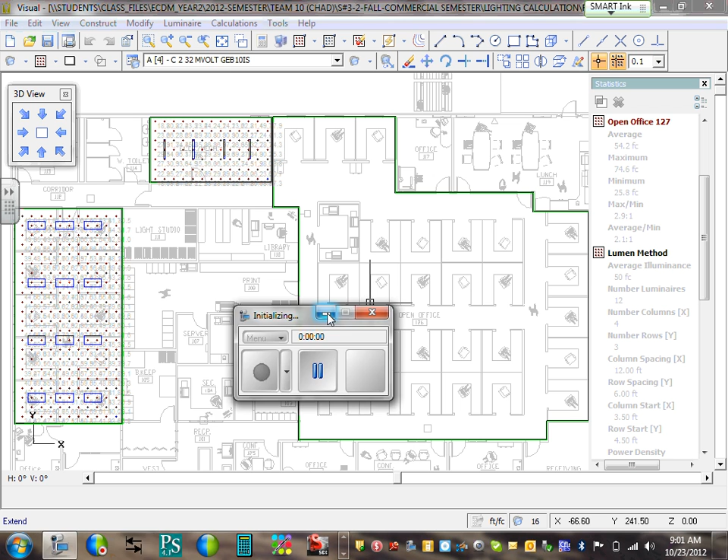December. So if you're interested, maybe just talk to Chad and Chad can send my boss a note, get you set up, get you an interview or something.

If you're interested. Yeah, do you want to say a few things about what you guys do, where you're located? We're located in Eden Prairie, right off 212 and Flying Cloud Drive, Shady Oak Road. We're a lighting manufacturer's representative, so what we do is we have not just Lithonia, we have probably 50 other brands of lighting that we try to get on the jobs that are currently going on.

What we'll do is we'll give them a layout, we'll give them options, and try to get our products on these projects. And it kind of starts right here for us. Some will have a big warehouse, they have no idea what they want. They got some old existing lighting, and we'll present them with 3-4 options of either LED or fluorescent high bays and things like that, and hopefully they buy from us.

So if you're interested, just let Chad know, and you can get a hold of me or Jeff, or we'll get it over to the chief and see where it goes. So you guys all have done quite a bit of this. Is there anything that's been difficult, or you have a lot of questions about? Yeah, you got a lot of this done already.

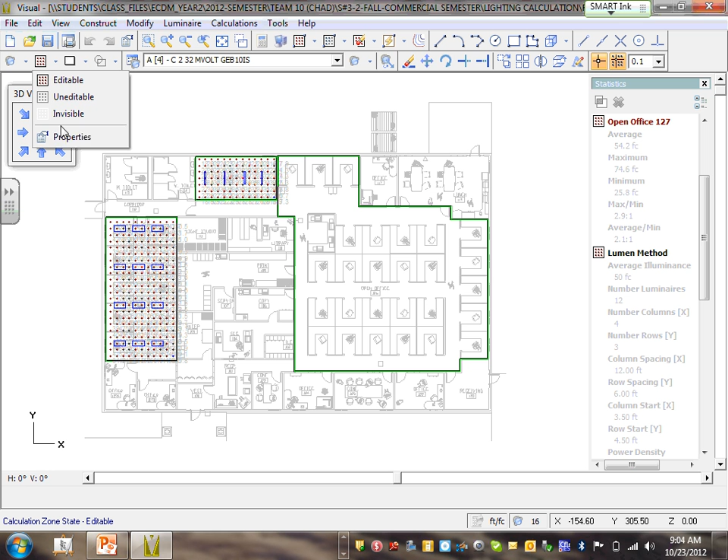Is there a way to hide the calc zones, so they're not clogging up the plans? Yeah. If you just look right over here, these are basically your layers. There's only 4 of them. So right here, it's calculation zone. You can do this a couple ways. You can go here and go down to properties. It'll bring up all our calc zones. Now on this one, we only have 2.

If you click on the first one, hold shift, select them all. There's this active button here. If you just turn it off and hit OK, they'll disappear. They're still there, so you won't have to go back in and add them all again. You can go back in and turn them on. Or if you want to turn individual ones on and off, you'd have it right here. Say for some reason you wanted just this calc zone off, you can just select that one, and same thing, turn it off.

Did you guys already build? I saw you had a list of all the fixtures. Did you build most of your schedule? Will you be using this schedule on other projects down the road, or will the types be different? We're going to be using LEDs next project. Okay, so they will be a little different. Good idea to talk about exporting the schedule too.

Yeah, if you were an architect or engineer, what you would do, we try to get in their office with engineers. Usually engineers will have their own schedule of lighting. They'll have their A, B, C, D. They'll have types of fixtures that they use on primarily all their projects. Well, we try to get in there.

So for someone like them, what this would help with is once they build this thing, you can actually export this and save it. And then when you open up another project, you can just bring the schedule in, so you don't have to sit and go find all these files. And depending how big the schedule is, that can save you a lot of time. Did you guys see that one? Just easy. Just export. You just save it to your desktop. Schedule or something.

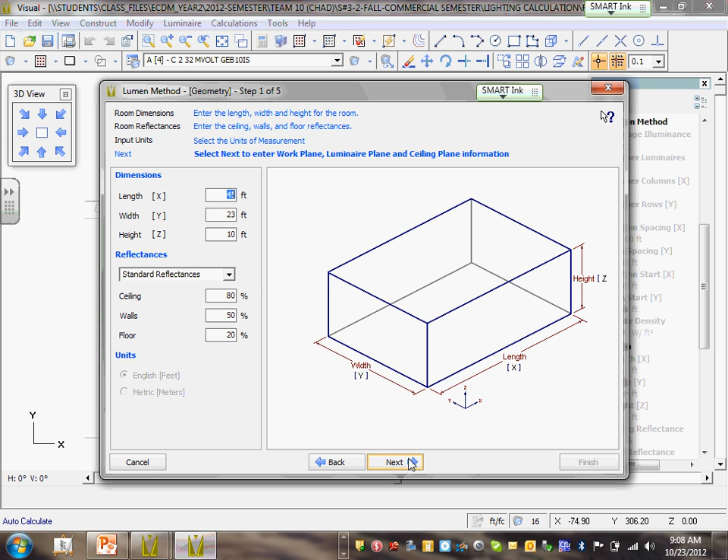As far as if we did the lumen method, let's see, let's just do a couple quick. So perfect. It's already done. So I'm just going to show you if we have multiple, like he was asking. We're going to say we have this room here, and then another room of the same fixture. This was just an example to show you how you get the two duplicate fixtures in your schedule.

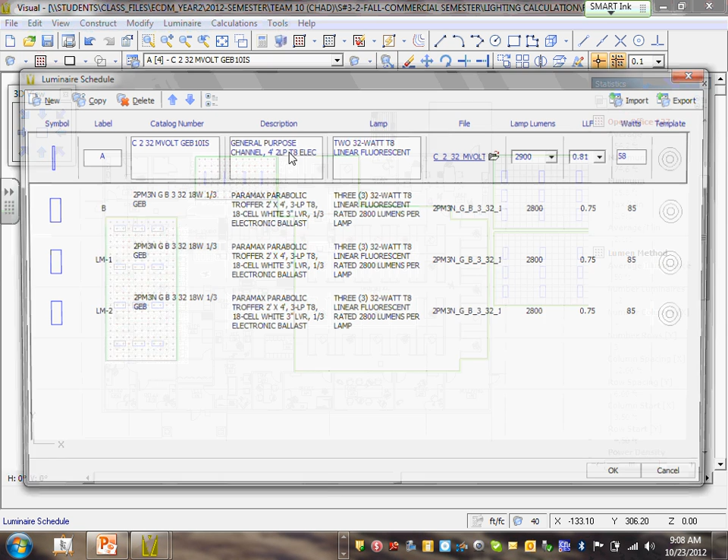So on our schedule, it automatically brought in these two. They're both the same. Well, that's just going to be cumbersome. You're going to have to go through, and it's going to be confusing. So what I'll do is come in and relabel one. Let's just say this is type C, even though it is the type B. Well, actually, we don't even need to do that. We already had our type B in our schedule. We'll just leave that alone.

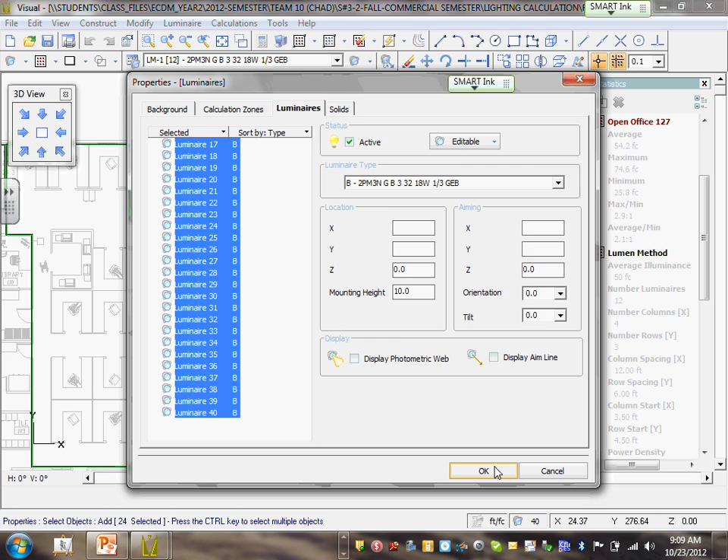So what you can do is come into edit, into properties. If you draw a box around just the fixtures here, it'll select them all. Then if you right click, it'll bring up this menu, and you could change them all over to B. Now hit OK. They're all Bs. See how this one is 0 now, and this one is 0. So then you'll go back into your schedule and delete that one and get rid of this one. Every time you use the lumen method, you'll have to do that, so you don't end up with duplicates. We can get rid of these.

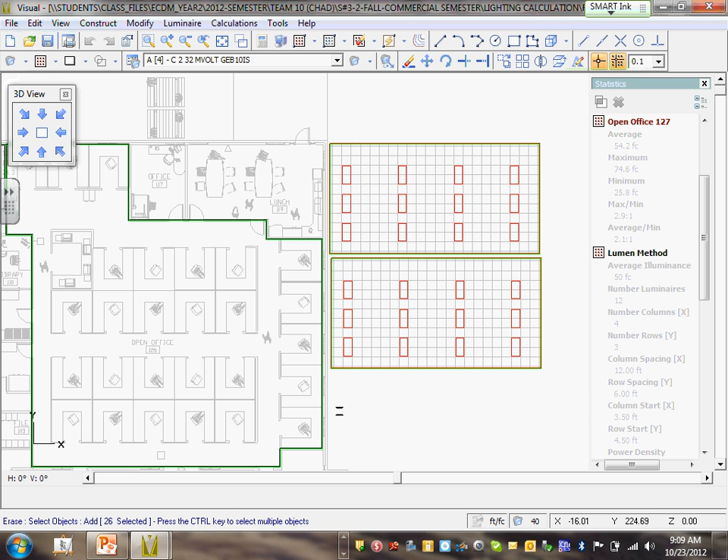Did you guys go into printing at all, getting this on a title block and all that stuff? Okay. So once you get all your rooms built up and you run your calc, you just calc out these two rooms. Let's say we're done here. We've got to put this on a plan to give to Chad or whoever. Up here, there's a little printer button, print editor. You'll come into here. You guys have a plotter here, right? Yeah. So you'll have that.

We do 11 by 17. You do 11 by 17. This should be the 500 HP. What is it? 5200? 52. This one. Yep. Okay. So once you're in here, you just select the printer. Sometimes I'll make a PDF file of this, so you can send it off to people who may not have AutoCAD or things like that.

It's just going to be a driver up here. Right here just lets you select your paper size, and you guys do 11 by 17. This one's different than mine, but we should be able to figure this out. Where's the paper size? So letter's here. 11 by 17 is up at the top. So that'll make our, well, now it's upside down.

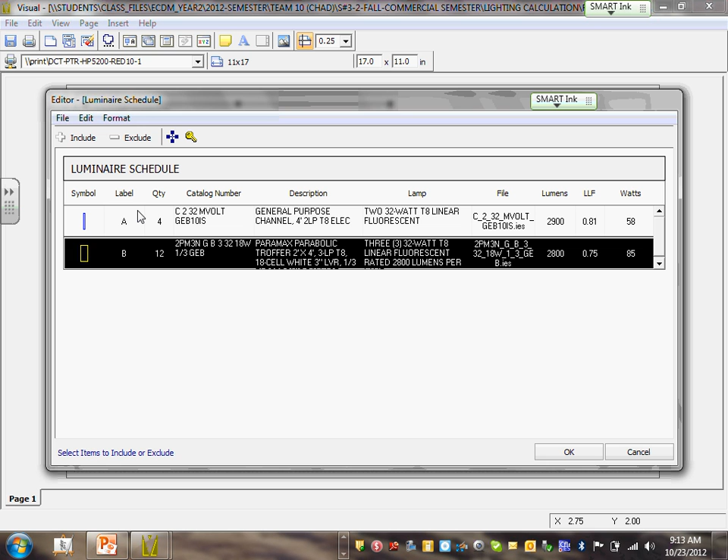So it's not there. If you just click on the screen, it'll come in. From here, if you just go to insert again, everything's going to be under insert for what we're doing here. I'll bring in my schedule. This might be tricky if you guys have a lot of types. If it's going off the page here, what you can do is take A through D, leave them on, but then take E through K, turn them all off.

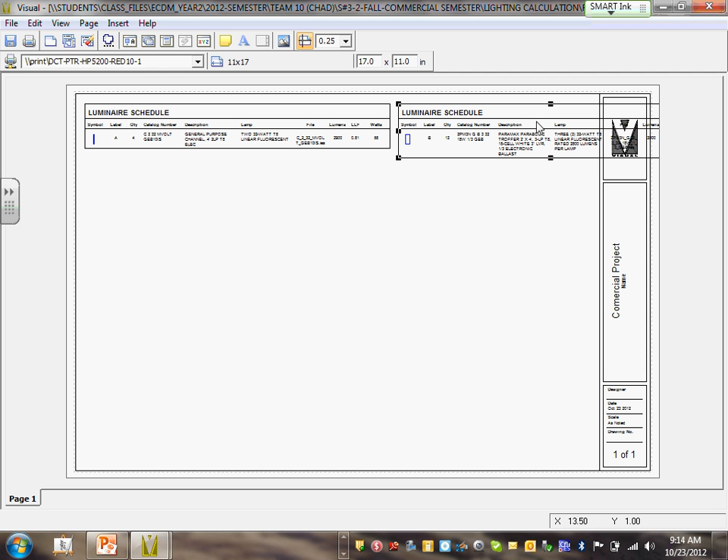So we can just do this. We'll turn B off, so we'll get rid of that. And then, if we had room, we could turn A off here and we'd have another list starting if we needed two lists to make it fit on a page. I'm going to delete that. I'll turn B back on. Can you go back and edit my block layout? Yeah, if you just double click on it here, you can go back in and change it.

So after, you can set this up however you want. I usually just have everything up here in the top left, so I brought in my schedule. Now I'm going to bring in my stats. That's going to have a list of all my rooms, and break down averages and all the actual numbers you calced out.

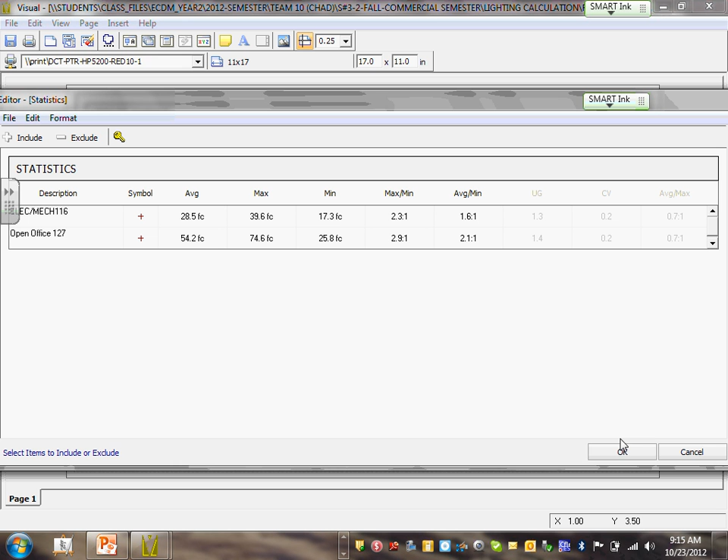And can I interrupt you just for a second, because you're right into where, if you guys go to the package that I gave you, it tells you how I want you to do it. If you want to follow up, you can go to page number 5, circle page number 5 in the package that I gave you, and it says lighting calculation using Visual, and I'll give it to you here too, so both are the same. That's what I would like you guys to print from it.

And in the page circled, this says first floor plan view with calculation in one sheet. There's 1, 2, 3, 4, 5, 6 sheets, 11 by 17, that we're gonna do. So here's right in here what we're asking them to do. And these are just guidelines. Everybody there? Circle 5. Okay. So you can build it right away. Okay, so you guys are going to break it down into individual sheets. So I don't know how you want to center it.

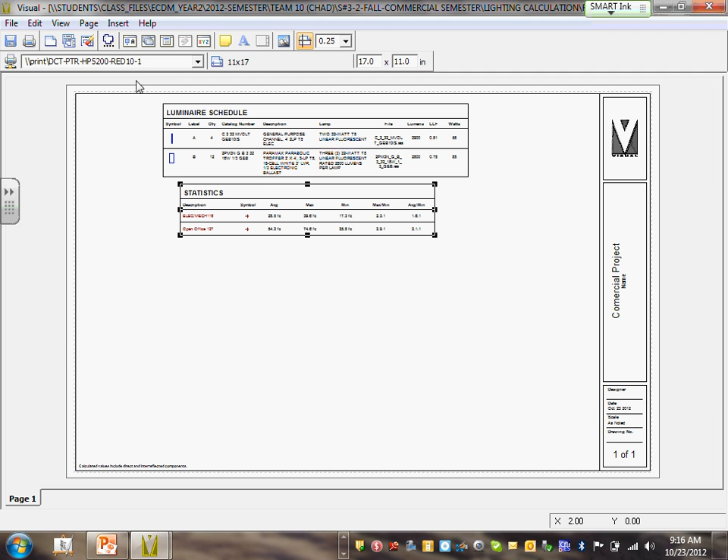So you're going to have first floor statistics and fixture schedule. Well, that's what we have here. I'm sure you guys are going to have a lot more than 2 types. By that one sheet, looks like you had a few. So this is going to take up a full page. So we're going to need to make multiple pages for this. So you're going to have just your stats and your schedule on one page.

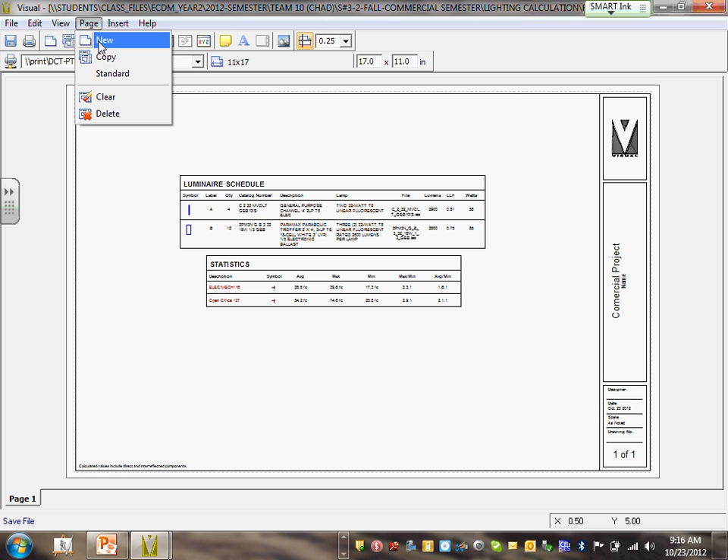Now to make a new page, because we're just going to keep making them, this will make this a little quicker too. If you hit page, you can hit new and it'll give you another blank sheet. If you hit copy, it'll make a new page and bring everything over, so you don't got to change all your title blocks and stuff, and you can just come in and delete all this stuff off. And it looks like you just have a first floor plan view with calc points.

So come up to insert and illustration. Right here they give you plan views, elevation views, 3D views. A snapshot would be if you want to take a picture of a certain area. It'll just bring in that. It's kind of like a window.

So we're just going to do a plan view, and then you'll just left click in one corner, drag it to the other, and it'll bring it in. Once it's in, you'll want to double click on it, and it'll bring up a menu.

Now right now it's telling us basically 1/16 of an inch is a foot. People probably understand 1/16 is a foot rather than 1 is 16, so I'll go ahead and change that. If you can make it bigger, it'd be nicer, but I don't think it's going to fit on our plan. So if you're going to do 16th, we're going to have to go change something else too, so you guys will be able to read this.

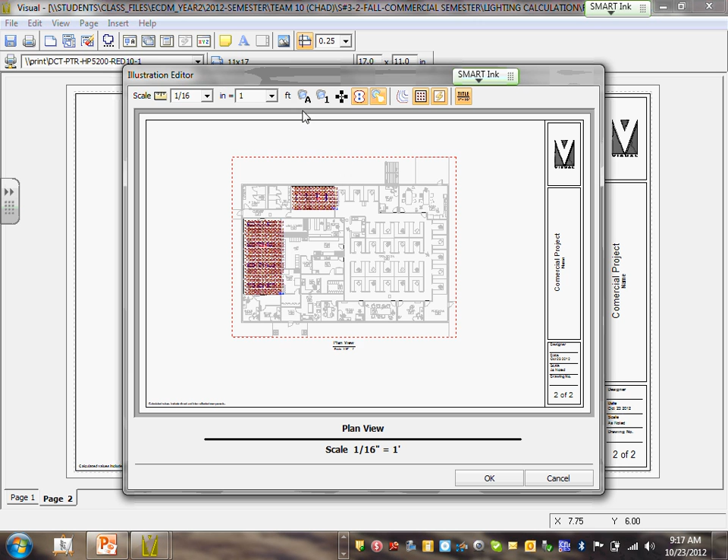Right here, this A button. So you got all your fixtures in your schedule A, B, C, D. If you hit this A, it'll turn those on, so you'll be able to identify what fixture you have in what room. This numbers your luminaires as you place them. I rarely ever will use that. This makes your fixtures fill in, so they're all blue. That'll be something you'll use in your exterior layout.

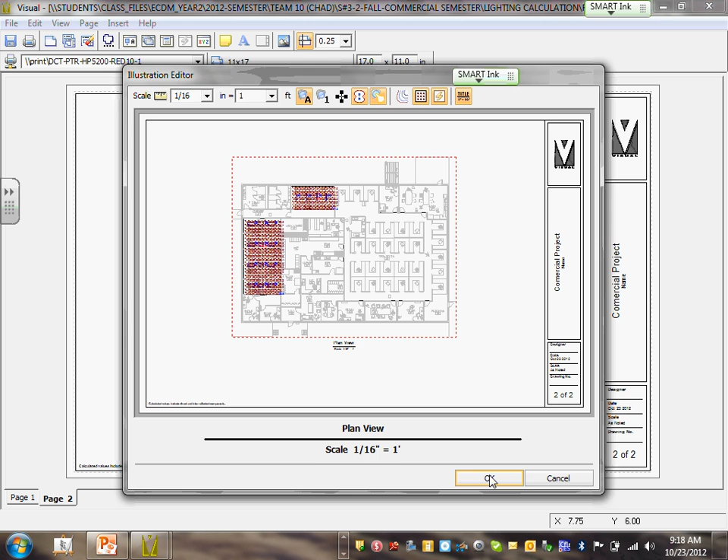For the most part, this is good to go. If you wanted to turn your calc points off in here, you can click on this, if you just wanted to show the fixtures and not the numbers. So we got that on here. Can you go by calc zone? Turn individual ones off in here.

Per page, if you just go by that calc zone, do you have to do a snapshot, or can you actually just do the calc zone? Just the calc zone, no backgrounds or anything. Well, just like if your calc zone's one room, so you're just taking that one room. Can you do it by putting that calc zone in it? I guess. I'm confused. Yeah, I think, Aaron, what you're saying is, can you turn a calc zone on and leave another one off? No, it's just because you're making a picture. You're basically doing a picture of what's there for that area. So if you just have one big room and you just want to do that one big room.

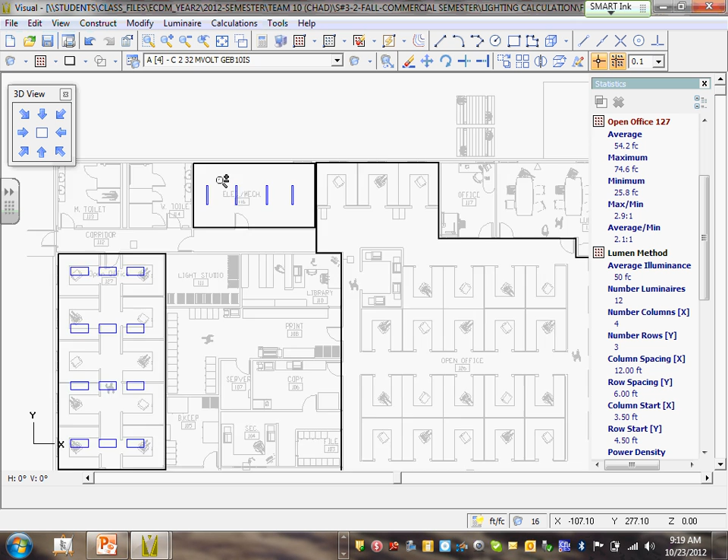Yeah, we can show you. Say, can I do open office 127? Just take that area. We'll do that on another page. So we'll just copy this over. We'll get rid of this. Then we're going to go back to the main area. So I think this is what you're asking. Let's just say we wanted to show just this room. You're going to want to turn the background on so it's editable. Now, in Visual, if you got solid lines, it's just going to select all solid lines, so it could be the whole area.

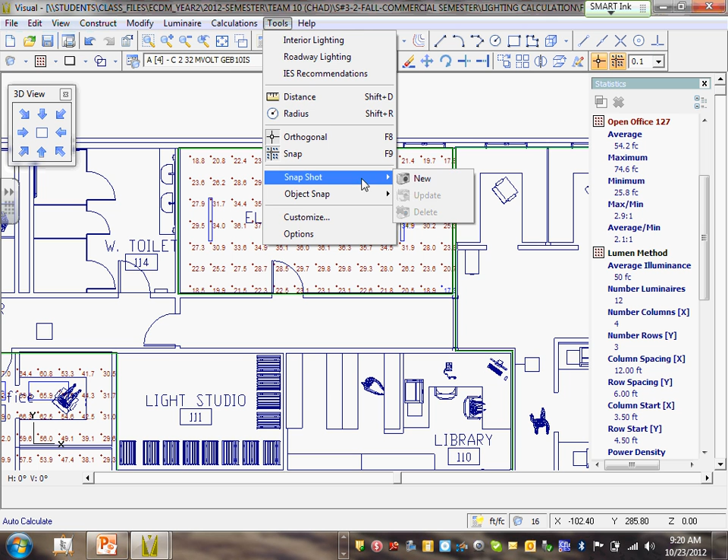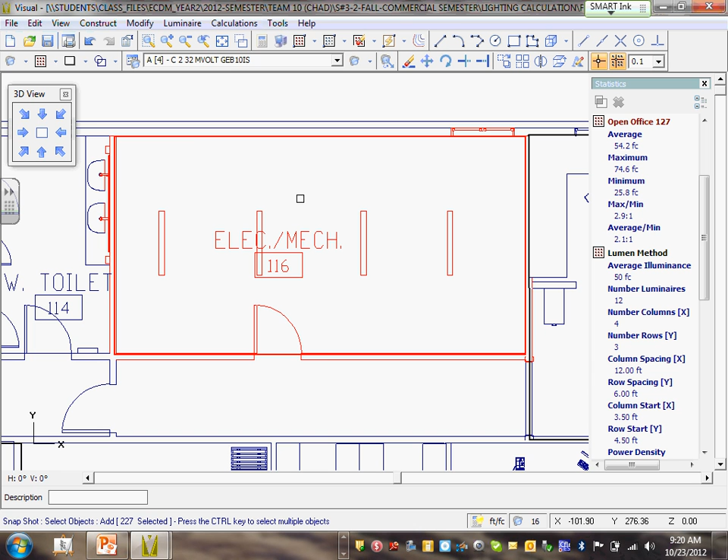But if you come up to tools here, under snapshot, you're able to make a new snapshot. Select new, you can label it. So if I just right click, I'll just say 116. If you select just this room, everything in red is in your snapshot now. So I'll label it 116. So it's like doing a calc zone for just that area. So if we made that, we right click, now it's saved.

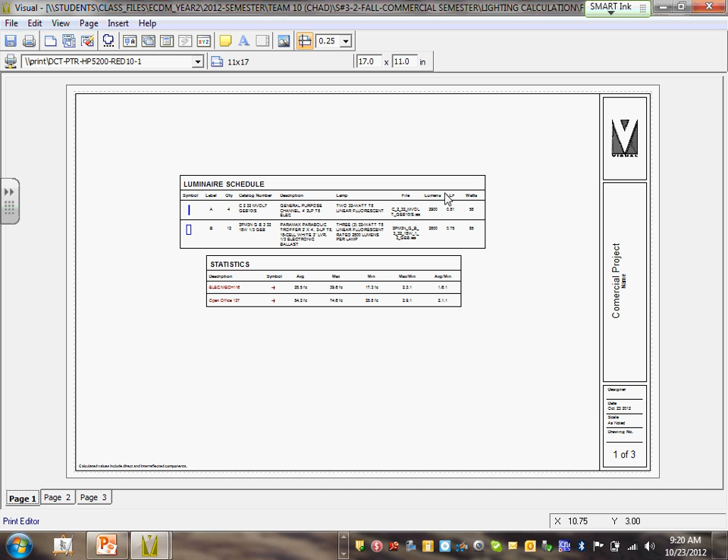Now we can go back in our print editor, and then we'll go to page 3, the one we made. And if you come to insert a snapshot, 116 will be there. Now you can just bring in an individual room, if you wanted to do it that way.

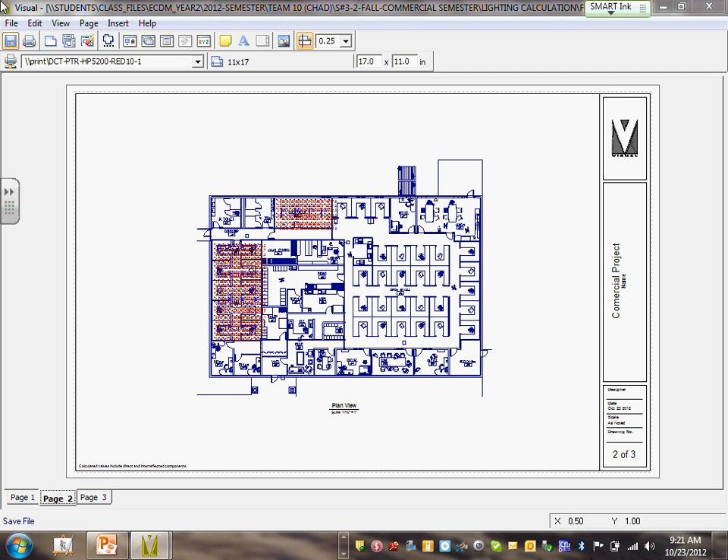Let's make sure we get everything here. So now our background's blue. If you're going to be printing these out, you're not going to want it blue. So if you just make this uneditable, then you won't move anything around while you work, and it'll look better on a sheet of paper. So we did all that. We looked at this. We got the scale set up.

Another thing that'll help clean up your drawing, I noticed, you guys all have a decimal in your numbers here.

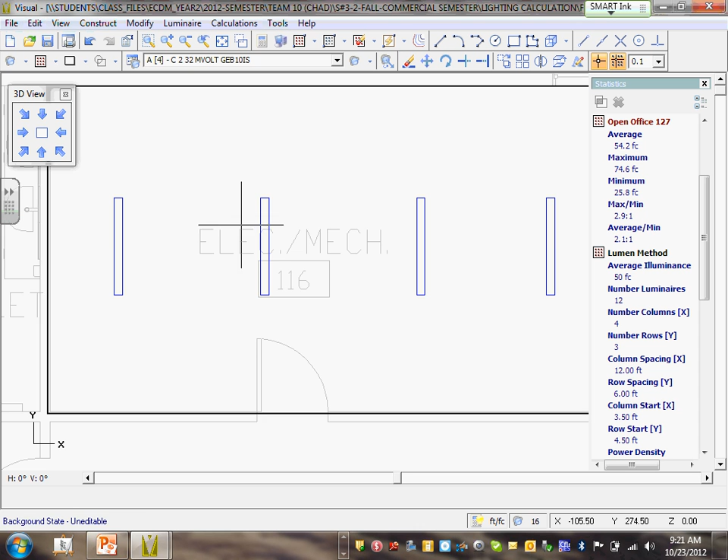With your calc and lighting, you know, we don't need to get that accurate. On your site lighting, you're gonna want to, because a 1/2 foot candle in the site is gonna be kind of your minimum. But if you go to properties here and select all your calc zones, you can turn this just to a 0, so you'll have nice even numbers.

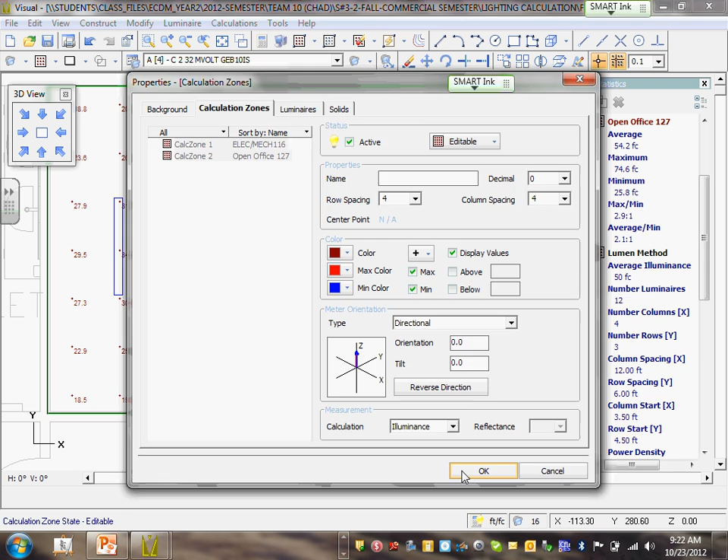And also, being that we're gonna be at a 1/16-inch scale, if we go and print this out right now with your calc points on these, see the row spacing and column spacing, I would change these to 4. Just because when you go to print this thing, they're gonna be all mashed together and it's gonna just be all black. It's just gonna wash everything out. You do that, you're gonna have less calc points in the room, but it's sufficient to what you need to see.

Yeah, if you're putting this on a bigger sheet of paper and you got to like an 1/8 inch scale, 2 by 2 would be fine. It's just that with a 1/16-inch scale, you can't read 4 by 4 calc points. They just blend together. You can see on here, you can actually kind of see the points. Rather, as before, it just looked like a big red square. So we clean that up a little bit.

What else do we got? If you needed to add notes to your plan, say you want to say light fixtures in room 116 are mounted at 8 feet, just so people will know where you're making this calc at. You know, the fixture's at 8 feet. You're going to want people to know it's not at 35 feet. You can add a set of notes as you please. Just click OK and it'll bring it in.

If you needed to add a picture, you could do that. That'll just give you a square, and then it'll bring up a file. What else can we do? For the lumen method, like on that open office area, that's such a weird shaped room. But you want the 2 by 2 ceiling tiles in there. You just have to make the area bigger so you can drop the fixtures where a tile would actually be.

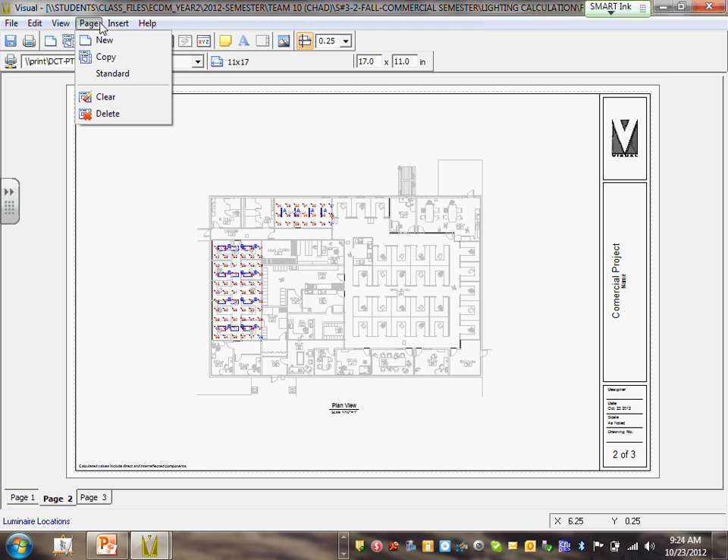You guys are all pretty up to speed here. And then you're gonna do all the same for your exterior lighting too. It's gonna be all the same stuff Chad and I have kind of gone over. We don't need this page 3 right now. So see how down here it's saying 2 of 3. That might get confusing, so you just want to delete that page, and then it'll just say 2 of 2. So you don't have people wondering where sheet 5 is when you only have 4.

What else have we got? Any other questions on the interior? Andrew, when we export, we always export it from here, and you multiply by 12 to accommodate for the scale. Is that the proper way? Yeah, that's the way you would do it. I don't know why, when you export it, it gets so small like that.

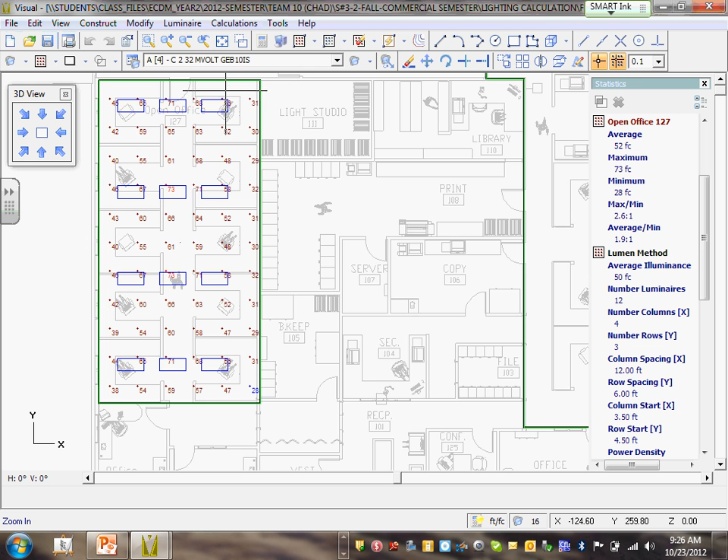Now, do you export out of here or do you export out of the print editor? We export out of here, and then we multiply by 12. Okay, that's fine too. If you wanted the schedule, you can export out of here, and what you see on the screen is what you'll have on the export. So it'll actually export the title block and all your stuff.

So if we set a plan view at, say, 1/4, which matches whatever we put in Revit, we don't have to multiply it again by 12? I think you still would have to multiply it again. Okay. Now, the other thing, last year, it was really cool when we export to Revit to have the fixture type right next to the fixture.

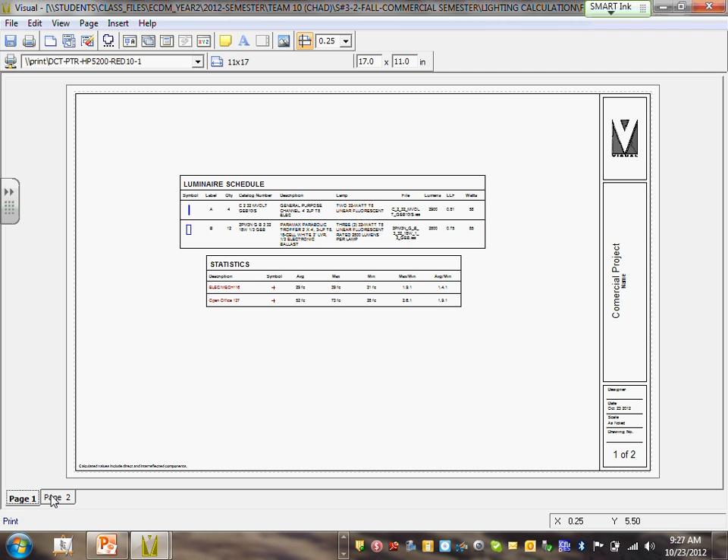It's easy, so the students can drop the fixture, right. How can we do that without being in the component editor or the print editor? Can you show if you get out of the print editor here? See, you can't turn the label on that. Export from here, and the labels will come with the fixture. Yep. And if you don't want the title block, obviously you can delete it in Revit or AutoCAD, or you can just delete it here and then export, and then all your types will be on.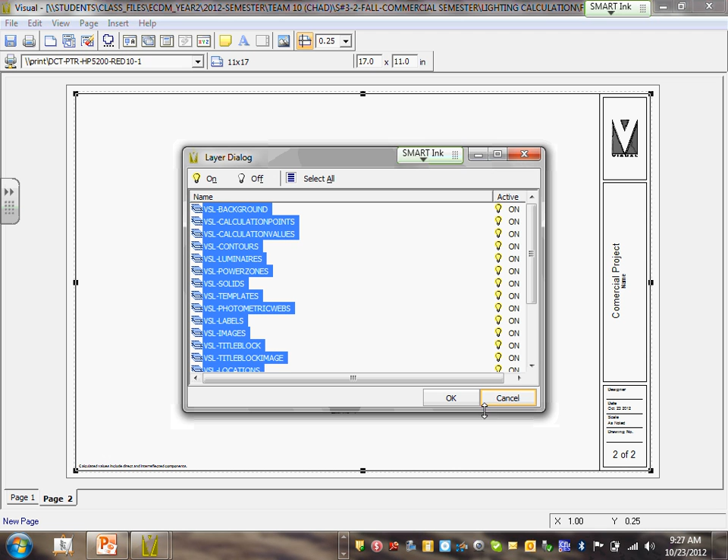I've never done it from here, so does it matter what scale you're doing it here? So we got our scale here. We would export, select all, and it's just going to export what you see on the screen. And then when we go there, we multiply again by 12? Yeah, you're going to want to check the scale and multiply it out as you need to.

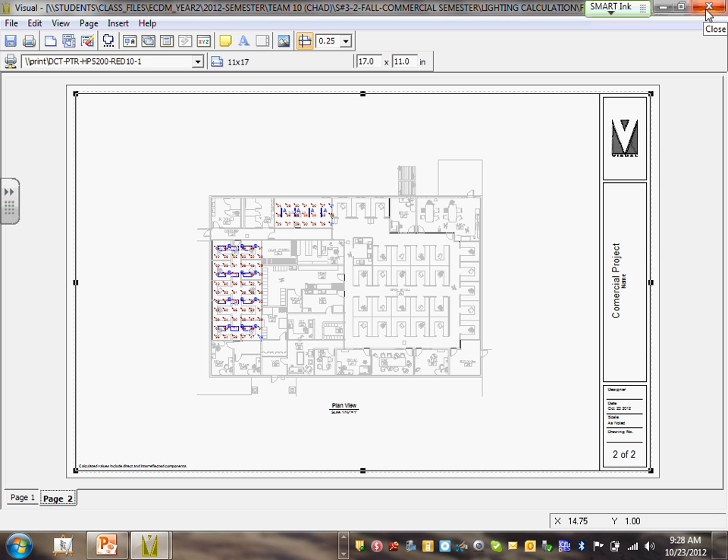All your guys' rooms are probably just a flat ceiling, like this room. Nothing is a slope ceiling. If you had to draw one, I don't know if there'd even be any interest in that. They do have it underneath help. I don't know if it'll link or not for us. If we click here. You guys all probably came here to download the program. Oh, let's see what we get here. Oh, that's not what we want. So I think it'd be under the lessons here, training videos is probably what we wanted.

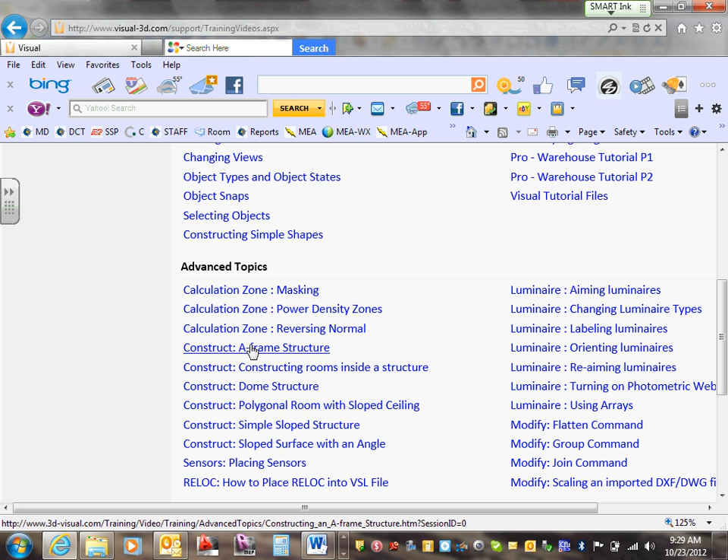So if you're having trouble and you're trying to get things done, if you just come to this website, pretty much everything you probably went over with Chad or myself is there. They're boring as heck, but they can help if you get confused. They'll teach you if you really want to draw a dome, or a slope ceiling like a church or something like that. All these would teach you how to do it. Where did we go? Go all the way down. Yeah, it should be there. There we go.

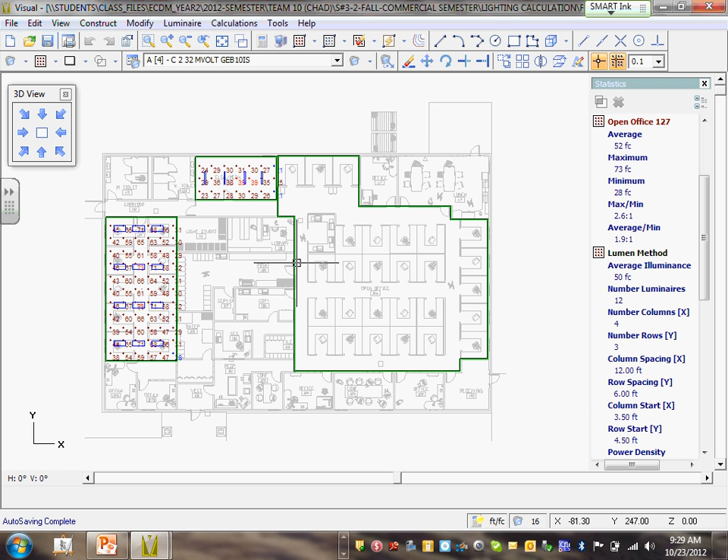Okay, you had a 3D view also with no calc points. We can look at that. I guess we will have 3 pages for each. So I will just go to page 2, copy this page, delete out the plan view. Over here you could write in 3D view or whatever you were looking at. So I have a blank. If you come to insert, down to illustration again, and then a 3D view, I usually do a southwest. You could probably do it any way. I just think it gives you a better view this way.

Now, the 3D view won't actually be to scale. So what you can do here is type in as big as it'll let you go on the screen, because there's no point in wasting paper space if you can get a better view of this thing. I don't know if we can get to 10 or not. Yeah, we can get probably 11. Being this isn't going to be to scale, you can kind of cheat it like that.

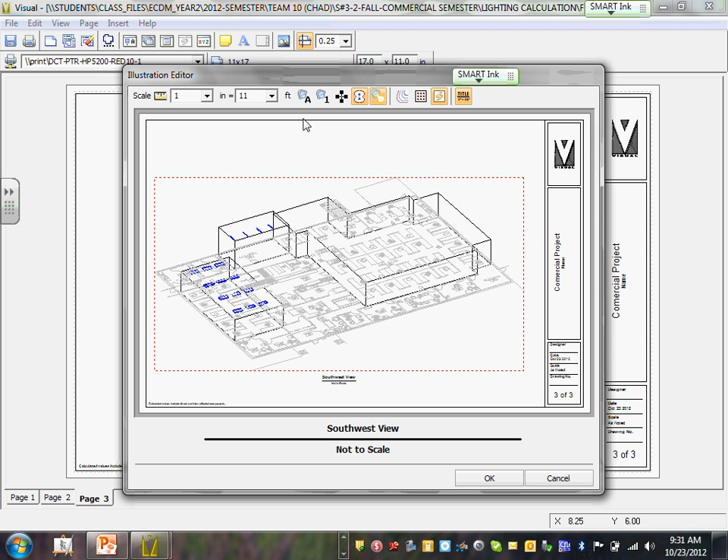It says with no calc points on your sheet here. You want to turn those off. Just turn them off. I don't know if you want to have the labels on. You put the labels on, and you'll have your 3D view. But if you see down here, it says Southwest view right underneath it, not to scale. If you want to get rid of that, you could actually just delete it.

Are there any other specific questions? No? Do you guys want to look at, did you do your exterior already? I'll open those here for you. Rendering, can we render here? There is a beta version of Visual, it's not available to people. But I do have one at the office, it's really not very good yet, but it is coming, so maybe down the road. Okay, so right now we can't. Right now, no, you can't. It's pretty generic still. They started working on it a couple years ago and it's still not done.

I can open the flash drive for you. Yeah, we can just take a look at that, see if we can. Yeah, file open. Yes, we'll save it. I was just showing the schedule. Oh, is that the schedule? That was just a.

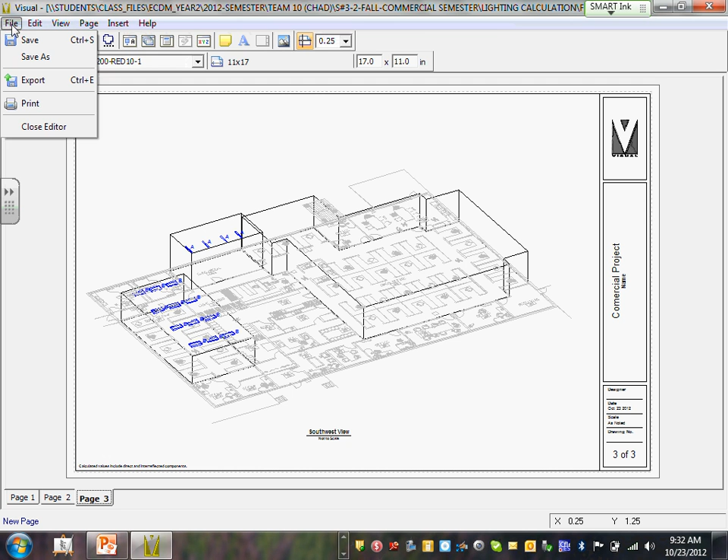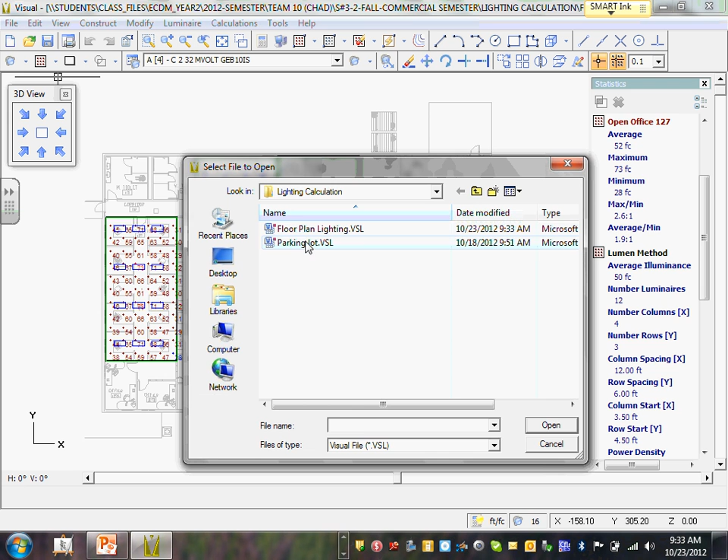Yeah. As long as we're here, can you just say something about the maximum average, how do you guys treat them, or you can do this on the site too? Yeah, I think the site will be a better way to look at it. Okay, here you go, here's the site that we did.

So on your site, it looks like you're using an HID source. Doesn't look too bad. You're not doing anything over here. We have a perimeter light over here, yeah, and we didn't use the right one, we just grabbed any one. Okay. I can see. So for this, you use the same thing. This is supposed to be mounted on the wall, right? Yep, and we have a catalog number for it too. Okay, and,

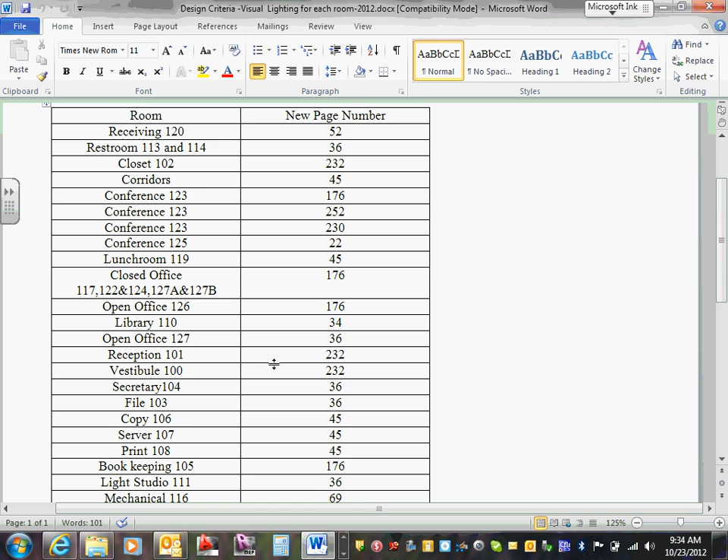That's on the, we can go switch that one, give me 1 second here. Yep, in the Word document. Perimeter light. Mechanical light, exterior exits, exterior doors, canopies. Thought we used the, I think you'll be fine. Anyway, I thought we had exterior doors, I think that's it, 544. That makes sense, 544. I think that's what we did. Okay. Oh, that's it? Yeah, we can add this to the schedule.

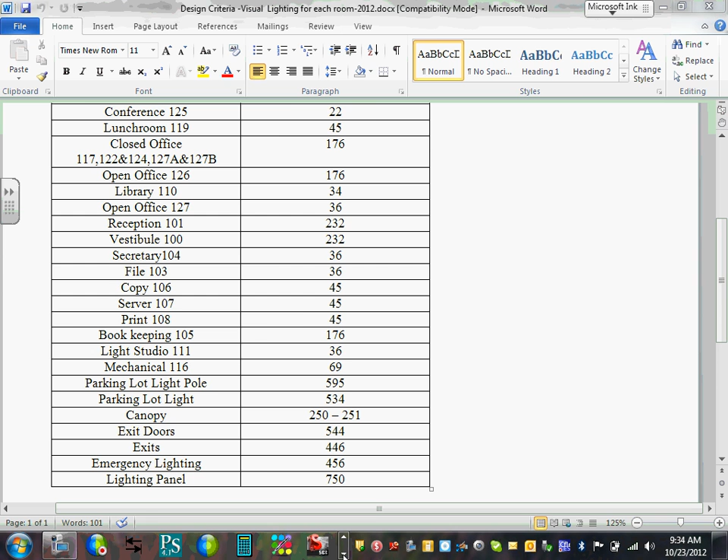So over here, I don't know if you guys have the same thing on your screen. This light here, currently right now, it's the same as your pole fixtures in the lot. Obviously, that doesn't look right. You wouldn't have a pole going through the building. So you guys actually have, on page 544, a fixture selected for your perimeter / door light, I guess. We're just gonna go ahead and add that.

We come to new here and go back one. I don't know if it'll bring you actually back two. Go to wall mounted. And this is a line of product, the WSD, WSR, WSQ. They're all gonna have like the same optic. They're all gonna perform roughly the same. It just comes down to what shape you wanted, if you wanted the trapezoid or round or like a sphere. We'll just use the WST for this one.

Which manufacturer is that? This is the Lithonia. It's on page 544. If you go into Lithonia and then outdoor, under wall mounted.

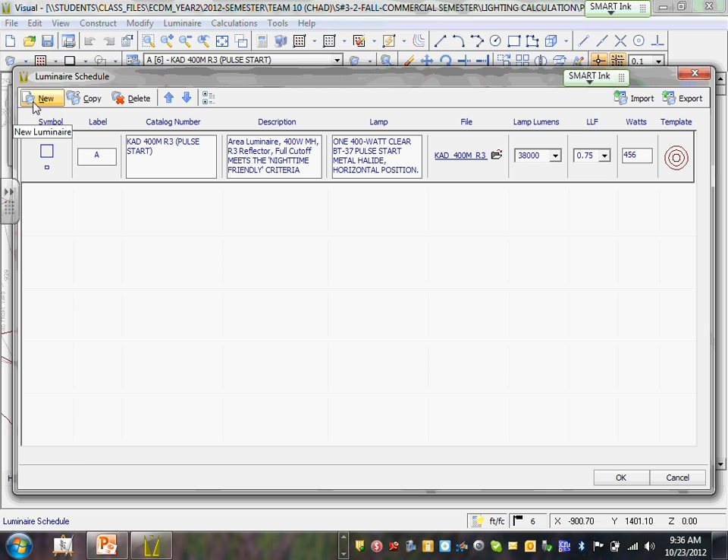While you're here, Andrew, the rule of thumb of picking the IES file, I know there's still tons of them. What I told him is you look at the example that they have in the book. Is there any other way, because there's so many IES files for these fixtures, which one to start with? What I told them, there's an example in the book that goes through the catalog number example, and just use this as a sample, most commonly used.

The way it would be determined for a lot of this exterior stuff, it's going to be based on a distribution and a wattage, which is determined by your mounting restriction. So you can only mount this thing at 7.5 feet. Well, you're not going to want a 400 watt light at 7.5 feet, or you're going to be blind. So for that, you're going to want to use maybe a 50 watt. And if it's over a door, say you want to get it out down the sidewalk, you're going to want to use a forward throw.

Now for this one, I don't think we have a mounting restriction. And it's more of a perimeter kind of security light. We could probably get away with, this is a forward throw. I'm thinking a wide throw, so we get kind of a wash along the perimeter of the building. And these are just pretty self-explanatory. FT is forward. If you look in here in the book as well, it gives you a forward throw, medium throw, and a wide throw.

Different lights are going to have different distributions, but for exterior, R2 is going to be like a roadway. So like on your schedule here, I'm just going to add this one too. But you guys used an R3. An R4 is a forward throw. It's just going to shoot as much light forward as it can. An R3 is kind of a cross between an R2 and an R4. As you can see on your plan, it's kind of more wide, but it doesn't throw it as far forward.

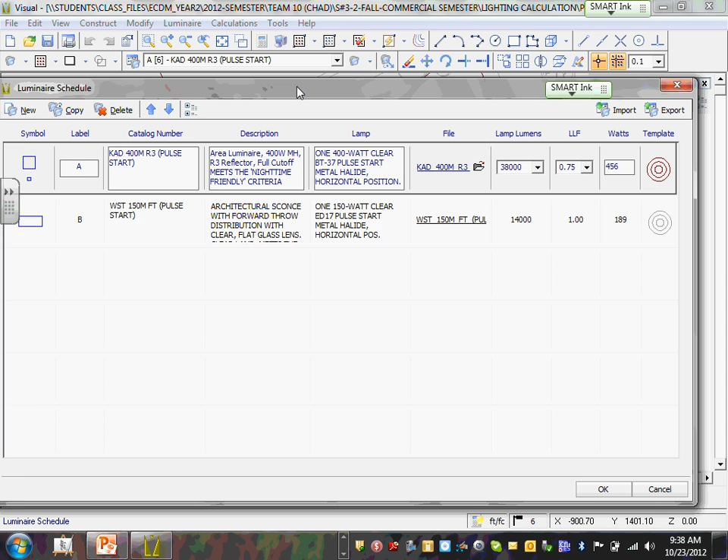So I grabbed the wrong one. We're going to grab a wide throw for the pulse start. That's just the ballast. A couple of years ago, they passed a law where any HID lights, I think it's 150 watts or above, all need to have a pulse start ballast. So you'll want to maybe factor that in.

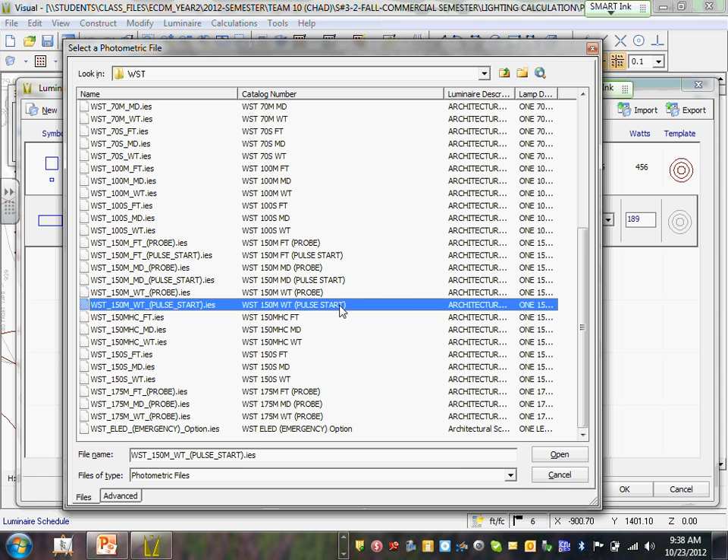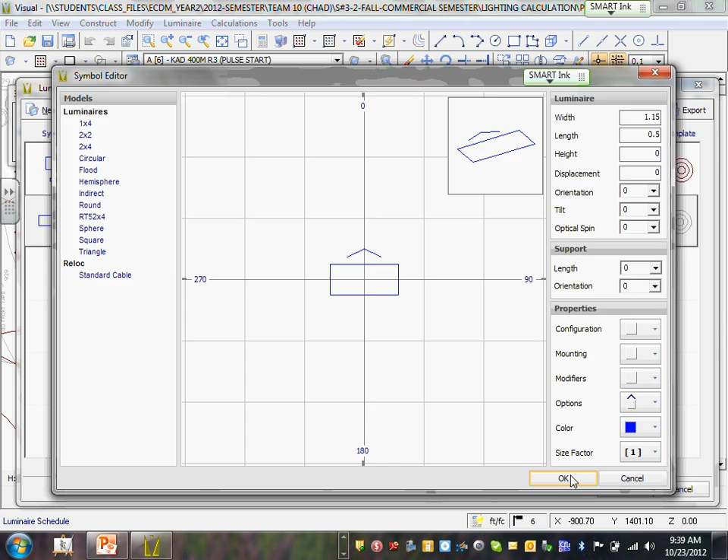Just leave that there. So we got our wide throw. You click on the symbol. This is kind of helpful to make sure you have your fixture going the right way. It's pretty easy to tell on a pole light, but maybe on these wall packs, you can add an arrow so it shows you which way the light's actually going. I'll turn that on. Give it our light loss. I usually use 0.75 for any metal halide fixture. We can turn on our half-foot candle.

I'm just going to go to Edit and Properties, and I'm going to select this fixture here. And right click, and it'll bring up this menu. So right now it's on a 30-foot pole. This is building mounted, so I'm sure it's probably not 30 feet up. We'll say 12 feet.

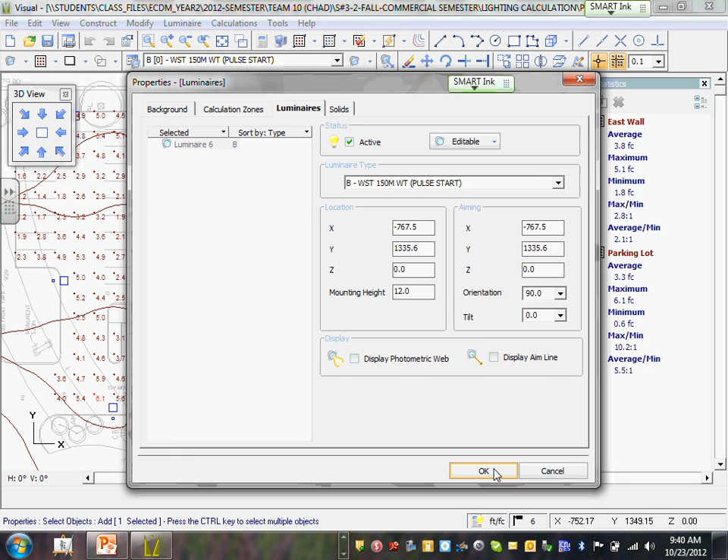So if you just have that one selected and pull down this menu, we're on luminaire 6, which is the fixture that was supposed to be on the wall. We change it to the wall mount, and we can type in our new mounting height of 12. Hit OK, and it adds our thing, but it's in the building. So now you're just going to select move and move it out of the building.

So over on the stats, we could maybe talk about this for a second. You guys have a pretty good layout here. So all these numbers, your average just takes all the points and gives you an average. That's pretty self-explanatory, as is the maximum. So you have a 6.1 that's highlighted in red on your plan. That's where you're getting the most light. You're getting contribution from here and here. And then it gives you your minimum as well, which is coming in at a 0.6, or that's on the perimeter at a 0.5, and that's up here in the top right corner, which is fine.

A good parking lot layout usually is right around a 1.5 foot candle average with a half foot candle minimum. And then this max to min is just your max and your min combined as a fraction. Try to keep that around 10 to 1. Well, not this one. Down here on average to min, anything under 10 to 1 on a site is going to be good. That's where you're going to want to be.

I wouldn't worry too much about this, especially with HID, because with HID you get a big hotspot under the lamp, and it throws higher numbers. With the new LED fixtures, you don't get that big hot spot. It's just a nice, even spread. You can get some really low uniformity. That's why you're able to get away with a lower wattage fixture in LEDs than you are with HID.

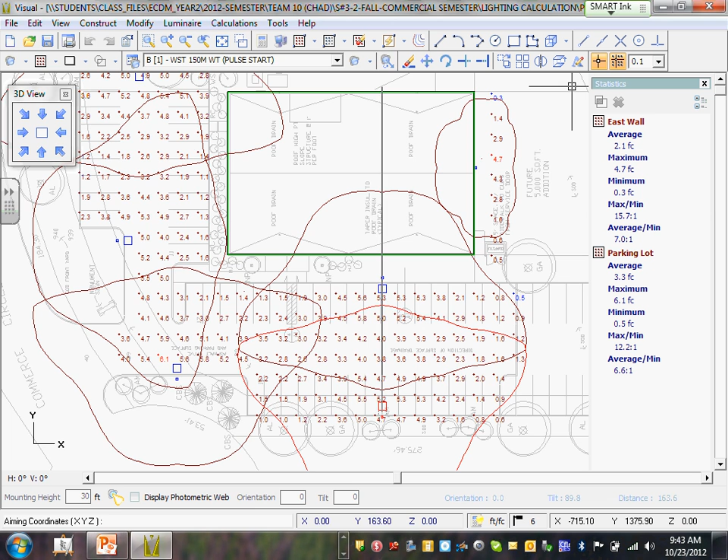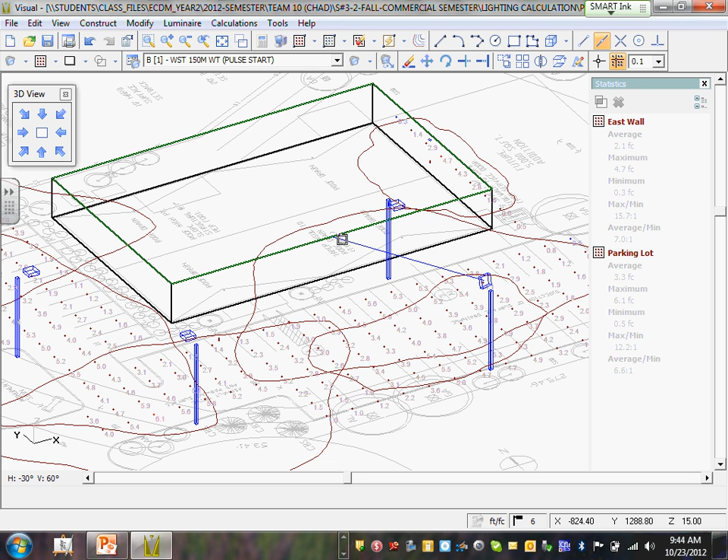And then we can go into a 3D view here from a southwest, and it gives us this aiming angle. We have our ortho on, which is probably a good thing to have on. Otherwise, we can move it all over. We're just going to aim it at the middle of this building. I just clicked the midpoint over here, so it'll get me directly in the middle of the building, and it'll aim that fixture right at the building there. You can see it kind of aimed right at the building.

Or you could, most cities around the Minneapolis area, anyways, have a 90-degree cutoff rule, so they don't want fixtures at an angle for light pollution. So right now our tilt is 89.8, and our orientation was minus. So we're just gonna put this back to 0 and 0, and that'll bring us back to our shoebox.

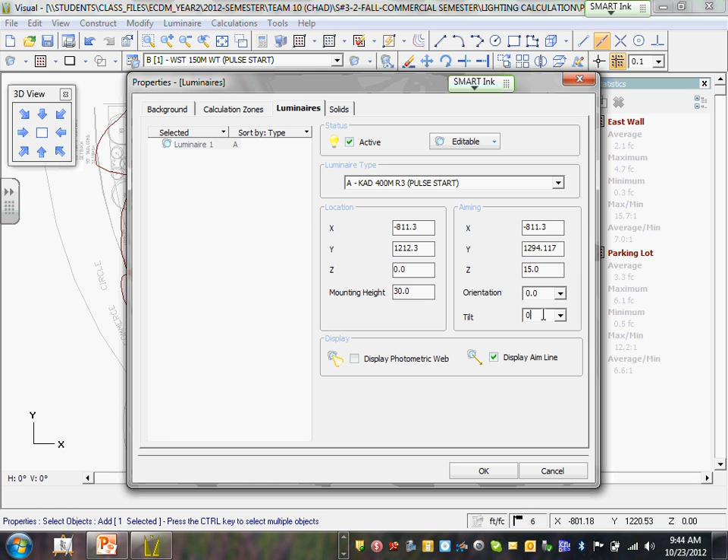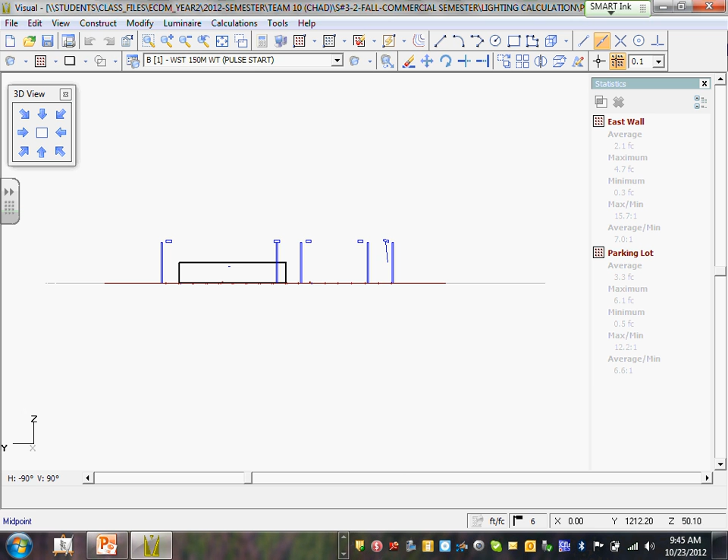Say we wanted to add, some cities allow like a 10-degree tilt. You can just type in 10 degrees, hit enter, and it actually just tilted that up a little bit. Sometimes you can get away with some of that, and I don't know if we gained anything by that or not. Let's see. Okay, let's copy this and see if we gain anything.

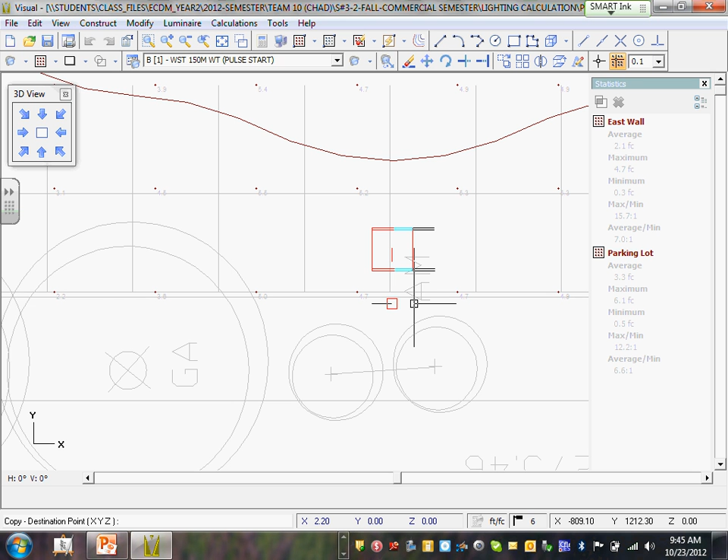Well, these would all be considered white light, right? Not like an amber. The metal halide is going to be a whiter light, like an LED type, and then the high pressure sodium is going to be your yellow, more industrial looking type fixture.

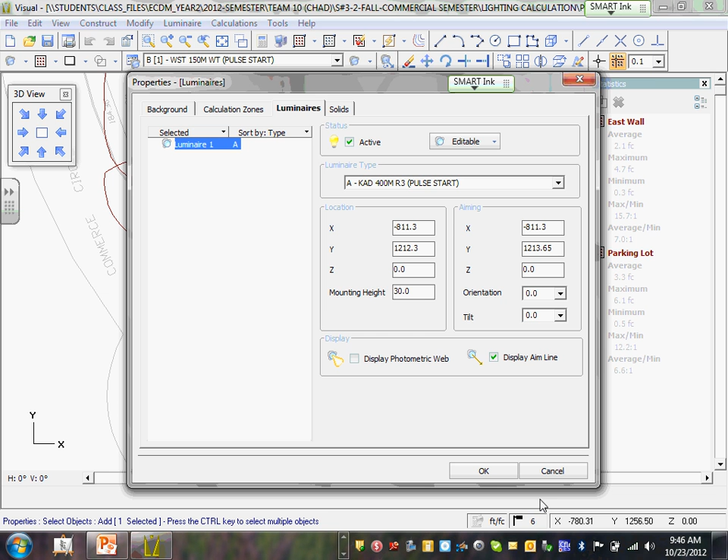So yeah, if you just kind of look, by tilting that out at 10 degrees, we gained about 10 feet. You can kind of see my template line there. If I line these up right on top of each other, that's a way to get a little more out of your fixture, if the city allows it. We'll just put it back at 0. But safe design is what you just did, 0, 0. Unless you know otherwise, 0, 0 is a 90-degree cutoff, so from the air you can't see it, and you're not going to get shine in the face.

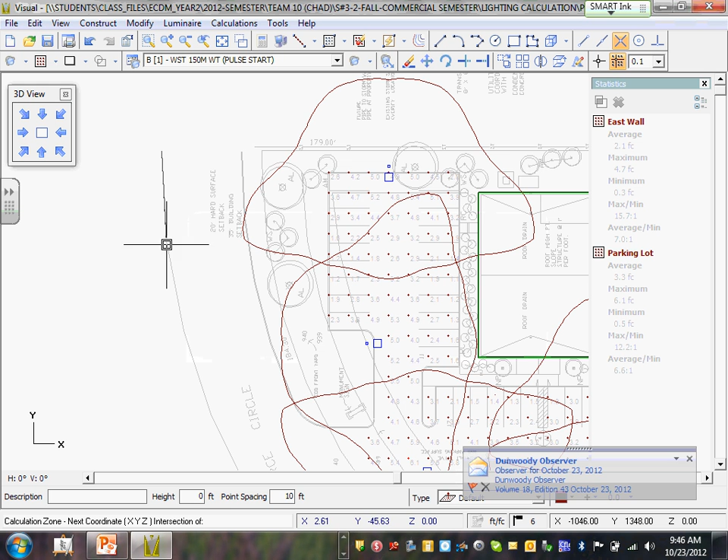Yeah, a lot of cities will have, so like this road out here, they're all a little different. Some of them allow you to spill like 1 foot candle into the streets. Others are really stringent where you can't have any. What I'll do then is underneath calcs here, I can just do a line, turn on my endpoint, well, maybe we'll use intersection, and click right along the edge of this roadway, and it draws in, say I can't go past this line, and kind of close that off. Well, I'm getting a 0.1 here.

So now that tells me I gotta go back in and either try to move my fixtures, or some fixtures you can get what's called a house side shield, and it puts a shield on one side of the fixture and then helps you meet these requirements. That's another thing we help people with, with design assistance to meet city codes.

And what they'll do is they'll take our site plan like this, bring it in, put it on their own company title block, and then they'll go have a meeting with the city and say, here's what we're planning on doing at our business, and the city will say yay or nay if it will pass. Otherwise, it'll come back to us. We'll have to change it around again and have another meeting, which adds more time and cost.

But Andrew, if you remember, these fixtures were put at 0.72? Now, day one, when you adjusted the loss factor, day one, these numbers will be higher. Correct. So that's something you might want to look at. A lot of times the city will say in their specification if they can be maintained levels, or some of them, like Bloomington, is probably the most strict city code in the area here.

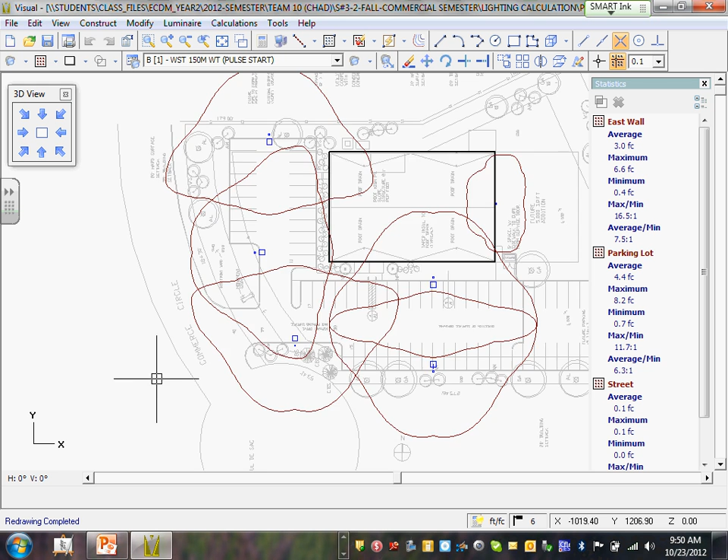I don't know if you guys can see that there's more to it than just throwing all these beautiful pictures. There's regulations they have to meet. For what you're doing, obviously you're not going to be following much of that, but your lot looks just fine. But down the road, if you're in the design part of the business, that's things you're going to have to pay attention to. It's like having a spec from an owner or an engineer of how they want things.

Other than that, what else you want to know? Any question for Andrew, guys? I think you feel comfortable running the calculation; it's not really a whole lot to it.

Really nice. I'm glad, Andrew, you indicated the property line and how to pay attention to the property line. In this project, guys, we typically focus on the basics and knowing how to use the software. What we give you in these projects is basically, I would say, 90% how to run the project. The other 10% is the business part, which is regulations they have to meet.

So if you guys want, for bonus, draw a line like Andrew did around the perimeter. And what did you say, maintain a point in the middle of the street, like Wilmington? Yeah, usually it's a half foot candle maximum into the middle of the street, so 0.5 max. So we met it at the property line here, right? Yep, based on that, we would meet it over here if this was our property line.

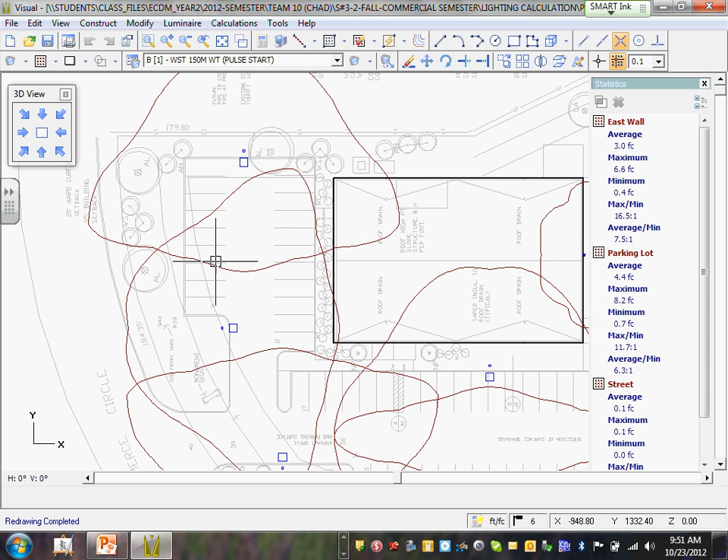Now, it looks like this is your property line and you'd come nowhere close to it. This red line is showing you where, everything to that red line, you get a half a foot candle the whole way around. So you can tell that this fixture is gonna be throwing light in the neighbor's yard; that might not be a good design. For that, we'll just show this with a house side shield. So for this one, we'll call it A1.

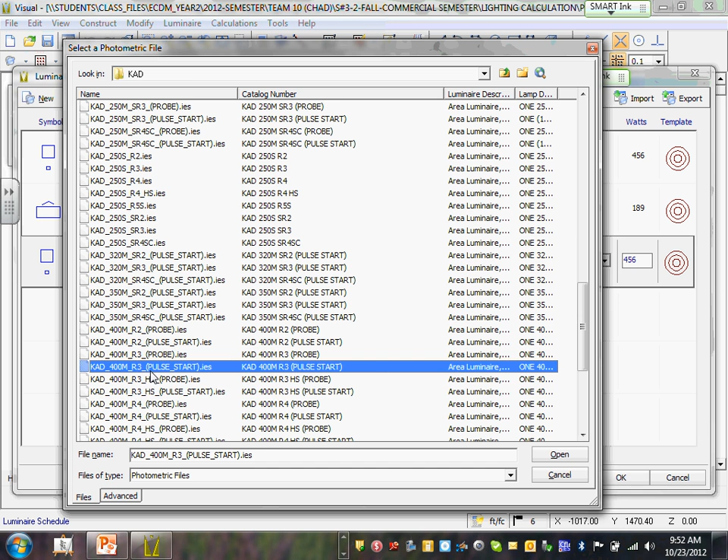If you come into the photometrics here, there should be one, right here. So you're using a 400M R3. This is the one you're using. We just add the house side shield to it. I don't think it's still gonna pass muster here, but we're calculating initial, that's fine, we'll leave that alone.

Come in here, and if we go to edit properties, say we didn't want this one to shine in the neighbor's yard. We could help it a little bit by adding that shield. See how it cut that off in the back a little bit? You're getting a little less spill. Kind of shows you how it changes distribution. Any questions, guys? Any comments?